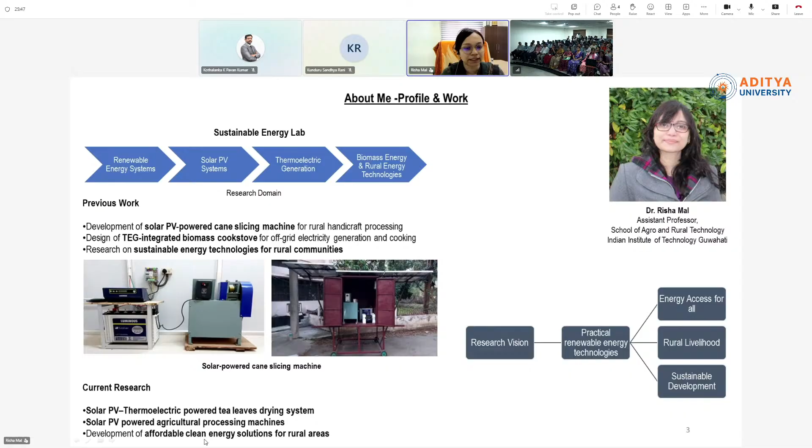My current researches include a solar PV thermoelectric powered tea leaves drying system, and many such solar PV powered agricultural processing machines, and we have also developed many affordable clean energy solutions for rural areas. Now, as far as the title of my today's talk goes, I mentioned three nomenclatures which are prevalent in the topic.

I'll first discuss the meaning of those words, and then maybe I'll move forward. So the first thing is off-grid. What do we mean by off-grid? We know grid, since we are from the background of electrical. But off-grid is something where we are not actually using the power that is being given from the grid - power is not taken from the grid, and it is totally sustainable of its own. It is self-sustained and does not rely on any power that we are getting from the grid.

Next is standalone. Standalone is a device which we can operate from a remote area, and it may require power, but standalone means it is an off-grid system, and it can be operated from a remote power source. Next is net zero emissions.

What do we mean by net zero emissions? This is a term that evolved during the climate change Paris Commission, when they were establishing the SDGs. They said that we should have net zero emissions - that means the balancing amount of greenhouse gases that has been released into the atmosphere.

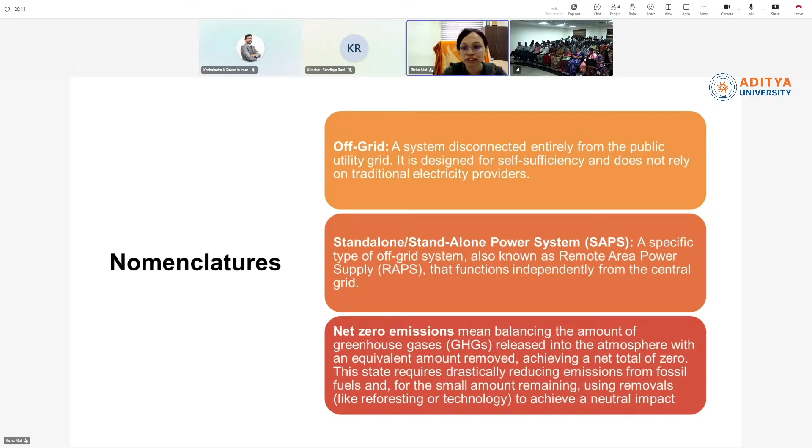So how do we do that? We know that trees do take carbon dioxide to sustain their growth. But this carbon dioxide, where do we get it from? We get it in the process where we exhale, in the process where we have emissions. So both the carbon dioxide that we emit into the atmosphere should be balanced - it should be such that however much is given to the atmosphere should be taken by the plant. That's how it works for net zero emission.

Now, the Paris Climate Agreement, what were the key points for the global impact of giving a shot to the climate change? They had certain things that they pinpointed and said these are the things that have to be looked over, and this is how we contribute to the nation.

So the first thing is temperature. We knew that the temperature is rising every year substantially, and the ozone is being affected. So they said that we should keep global warming in check, and it should be well below 2 degrees Celsius per year. This was the primary key point that they had to check.

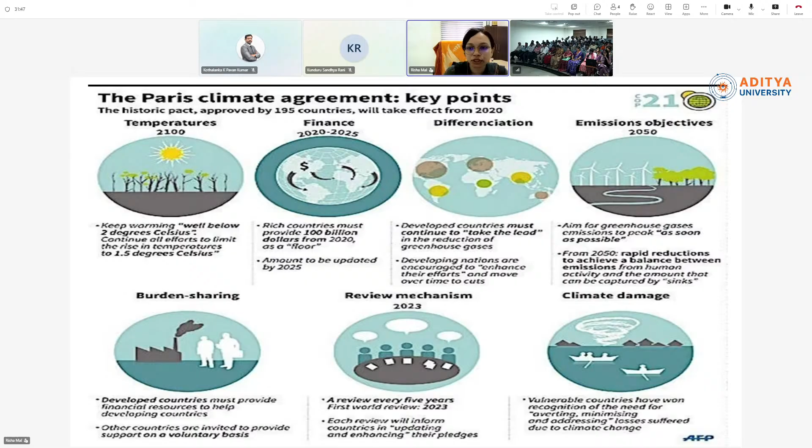And the climate damage. They are also saying that the countries that are very vulnerable should minimize the losses being suffered due to climate change, and they should check on the things affecting the climate change, which has to be mitigated. So this is for the vulnerable and developing countries, that they have to make this prominent, that they have sufficient efforts to make the climate change goals happen.

Now, when we are talking of climate change, there are certain components which enable the environment for off-grid renewable energy solutions. So what are these components that have to be taken care of so that climate change can be addressed? We should have policies and regulations.

We should build capacity so that more and more people are aware of it and can contribute to climate change action. And then we should also have institutional frameworks where institutes come forward with their research and contribute to the climate cause.

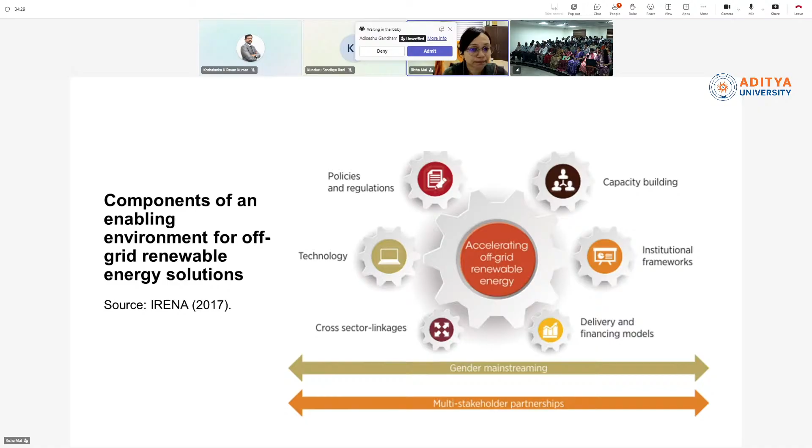Now we will look into some of the renewable sources of energy and what percentage of those renewable sources contributes to the nation's development. We have wind power, which contributes 10% of the total renewable energy sources. We have geothermal, again 10%, tidal energy power 10%, biofuel 10%, hydroelectric power 10%, solar power 10%. So we have this whole bunch of renewable energy sources which can contribute to the development of a sustainable energy system.

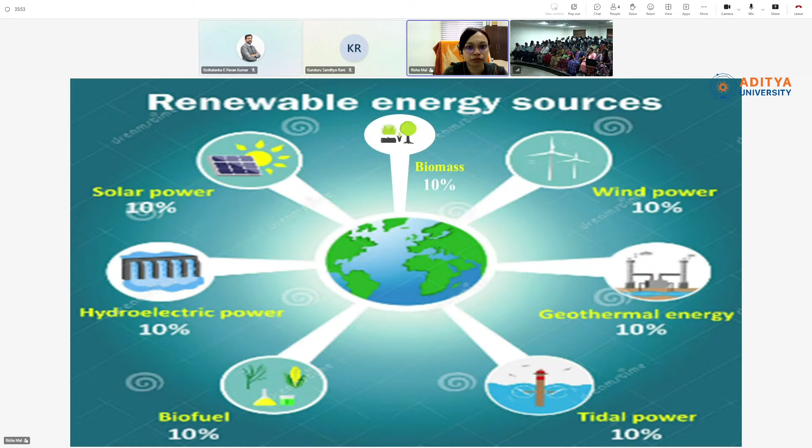But one of the major renewable energy sources which we have overlooked over time is biomass energy, which is also 10% of the total renewable energy sources, and has not been explored greatly for energy or power delivery as in the case of other renewable systems. Yes, biomass has the potential of giving clean energy, but how it has to be done is a challenge, and we are trying to develop technologies which actually run on biomass energy.

So before starting with biomass, I will first concentrate on the biomass technology which we have developed in our laboratory and which runs efficiently. We have developed a system that runs efficiently on biomass, and it is capable of giving power from biomass energy.

So first of all, we will introduce biomass, what it is. Biomass is nothing but all sorts of organic matter like plants, wet waste, and any organic matter you can talk about which comprises biomass. Biomass refers to an energy source, and it can be successfully harnessed by directly heating, by combustion, by burning the biomass to produce heat. One such application is cook stoves.

Nowadays cook stoves, earlier used in most households, are predominantly found in the rural sector. People who reside in rural areas still use cook stoves for cooking.

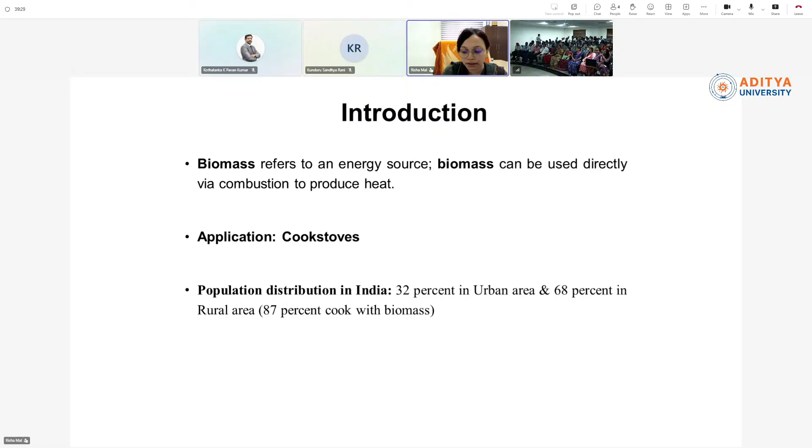What do we use for cooking in our household? We do use LPG gas, right? Yes, so ma'am, we do use LPG in our household, but there are so many households in rural areas who use cook stoves.

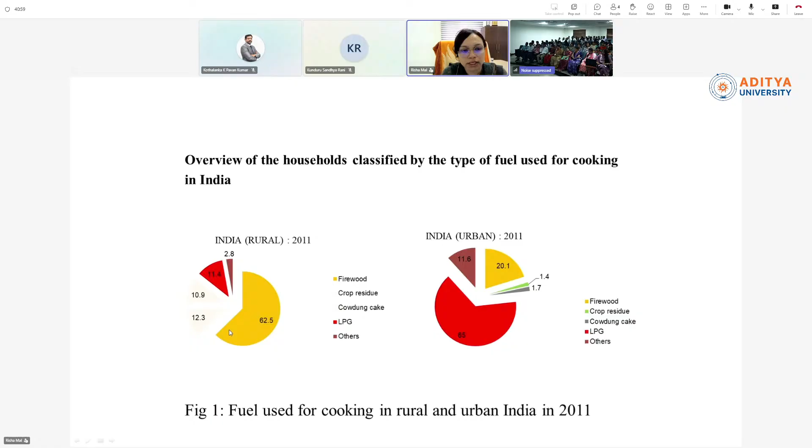Here we can see statistics of rural and urban areas of India. It's a bit older, but nobody has taken statistics after that, so it gives a faint idea of the scenario of cooking in rural and urban areas. In rural areas, a larger chunk of people rely on firewood, crop residue, and cow dung cake, with a very small percentage relying on LPG. On the urban side, most people use LPG, but a very small percentage use cook stoves, firewood, or crop residues. Those who stay in slums or in very poor conditions actually use cook stoves in urban areas. So we can see a clear difference in the usage of cook stoves in rural and urban areas.

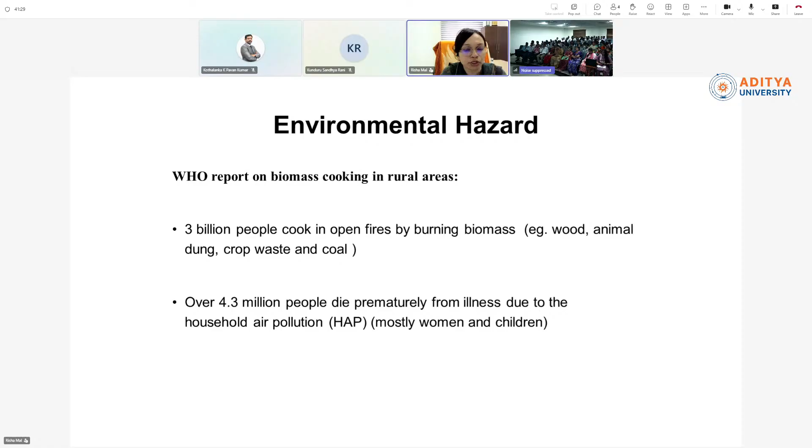Now, what is the impact of using those cook stoves? The impact is environmental hazards. The WHO has reported that nearly 3 billion people cook food in open fires burning biomass, and statistics say that 4.3 million people actually die prematurely from illness due to indoor air pollution, with the affected population mostly being women and children.

Now, this is what a cook stove looks like. Those who have not seen it may recall it. I do not know whether I am good with the language, what you use to call this stove. Is there any term for this stove?

Ma'am, in Andhra we call it as katla-poyi. So, yeah. Okay. It's the same thing we use. That's good. Yeah.

Okay. So I think because of the term that I'm using, most of you have not understood what it is. So this is what the stove looks like. This is predominantly used in rural areas. So what is this? They use this for cooking food, and many countries all over the globe use this cook stove, or three stone fires, three stone stove we call it, for cooking.

So these are some of the places like Cambodia, Nepal, Guatemala, where this kind of stove is actually used till date for cooking. These run on biomass; they use agricultural waste, cow dung cakes, those sort of things to feed inside the cook stove, light it and then cook food. But you can see the amount of emissions it is giving out. Now, what is the problem? We know the problem. It is the environmental and health hazard.

Now, many kinds of cook stove designs have come up. Why they have come up with efficient cook stoves is because people want their food cooked in cook stoves, because there is a factor of taste in India; they say if you cook with biomass, it gives a different taste. Again, the advantage is much more because they do not require money to buy fuel to feed inside the cook stove. They do not have to worry about any construction or maintenance charges. So everything is free of cost, and it is very handy for everyone who resides in rural areas. So they are actually using those kinds of stoves.

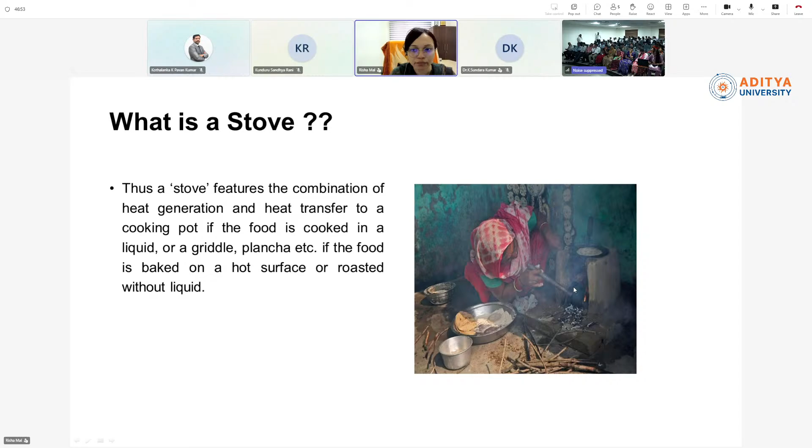You can see in this picture, right? She is using a small pipe. So this is how she is improving the combustion of this stove. She is blowing air inside the fuel, and she is trying to make the combustion better with low emission. But this is not enough air that she has put in. So these kinds of stoves have evolved out of researchers.

Now, this is the concept that we have proposed for a forced draft stove. We should understand that a natural draft stove does not have a fan and a forced draft stove does have a fan. The stove that has a fan is the most efficient one, because it is actually driving more air inside the cook stove. So this is how a forced draft cook stove looks. It is a two-chambered stove.

It has small holes on the top and also in the bottom, and there is a small vent where a fan has been connected, and this fan drives the air inside these holes so as to increase the air to fuel ratio. Now this fan is driven by power, right? Any device which has to be run should be run by power. So this fan runs with the help of power.

But in rural areas, some places do not have power supply, right? This is a genuine problem prevalent in the rural areas of India. The woman cooking on the right hand side of the slide does have an LPG cylinder, you can see, but she prefers cooking on the traditional cook stove. It means that though the LPG connection is there, she still relies on traditional cook stoves.

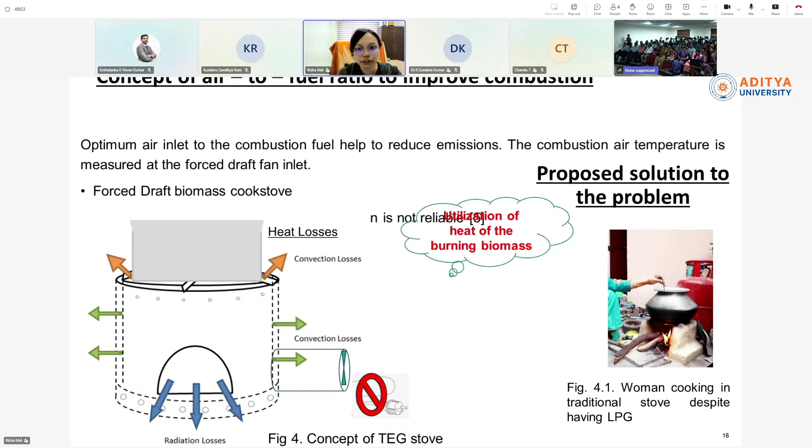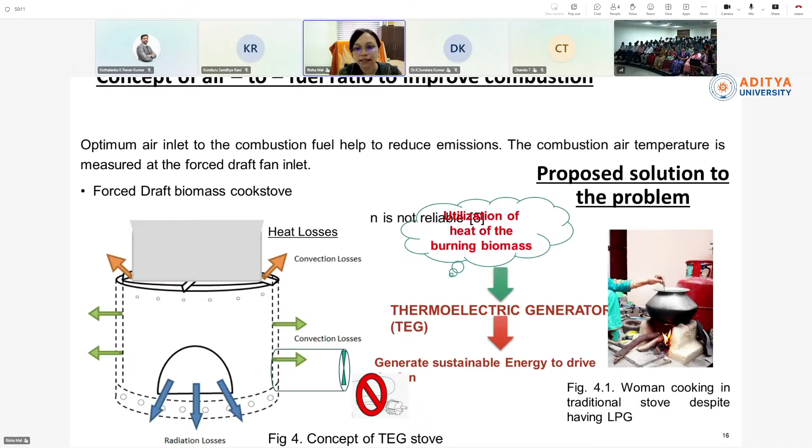So the concept is we are utilizing the heat of this burning biomass, and we are using a thermoelectric generator in this cook stove to generate sustainable energy so that we can drive the fan. Now we will talk about the thermoelectric generator, what it is and how it works. This is the point where we as electrical engineers can come forward and contribute to such real life problems. So what is a thermoelectric generator?

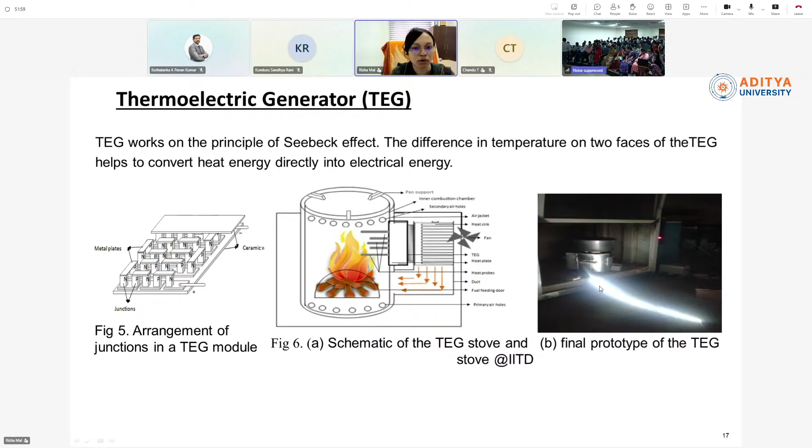And this is the laboratory scale prototype of the thermoelectric generator cook stove. See how efficient it is. It is burning efficiently without emission, and it is also lighting a small lamp. So this is how the final product looks. Okay, so now we will understand a little about what thermoelectrics is.

So we have understood that the fan that we require to drive the forced draft cook stove needs power, but here in this TEG cook stove we are not using any power from the grid, and we are solely developing our power from the burning biomass, and then this power is used to drive the fan, right? So this is how it is, and we will understand a bit of thermoelectrics, how it works.

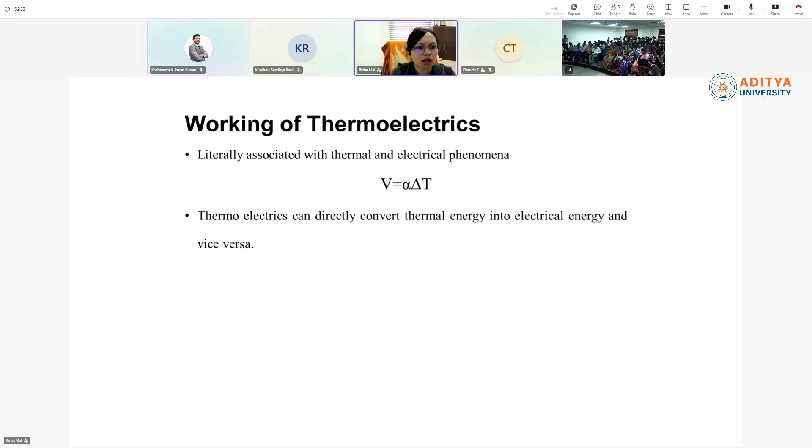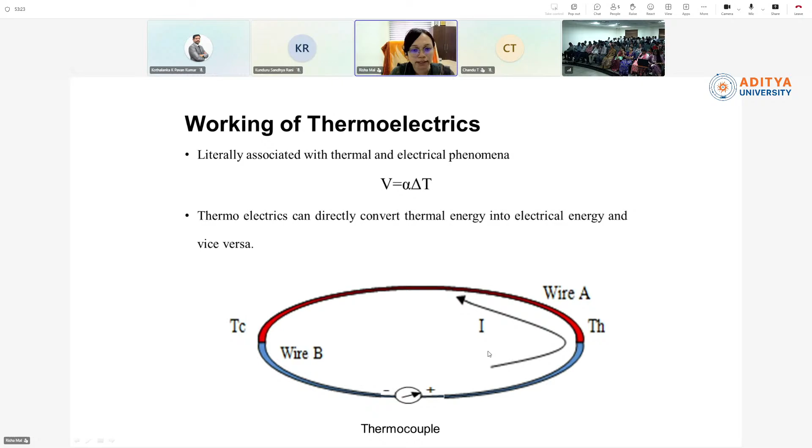As I said, if we apply heat on both faces of the thermoelectric generator, then it will develop power from the difference in temperature. But a very primitive one, if we try to understand, this is how it works. If we take two wires of different material, wire A and wire B, and we make a junction at two points and keep one junction at a hot temperature and the other junction at a cooler temperature, we can see the deflection of a galvanometer stating that power has been developed between the two wires. This is the fundamental of how thermoelectrics works.

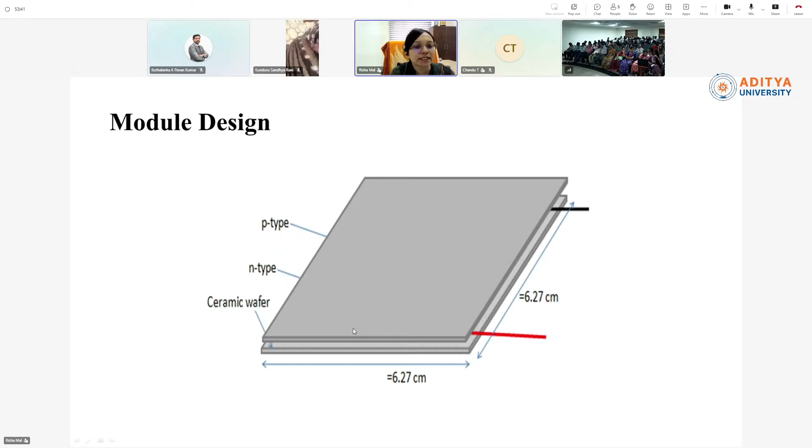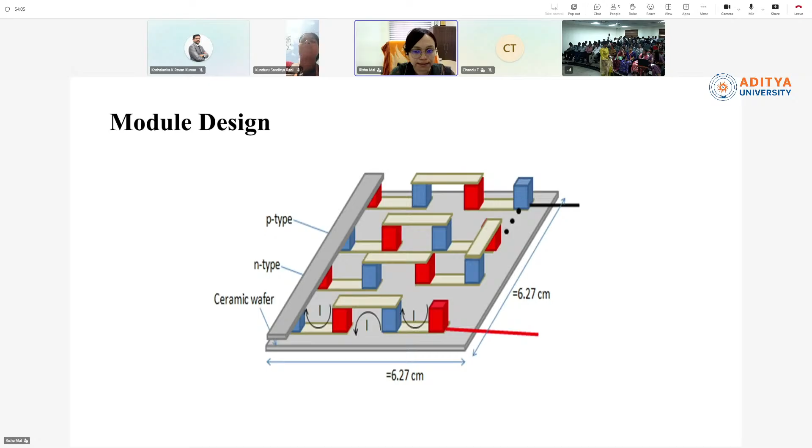This is how the module looks, right? As I said, this is a small chip which is 6.27 centimeters on both sides, a square plate, and it is covered with a ceramic wafer. If you see the inner side of this thermoelectric, we can see small legs of P and N type junctions. They are connected in series with each other, so that when we put this in any heated device, it can sum up the voltages, and the power delivery rises up. Right?

This is one section of the P and N junction that is put inside the module. So here we can see it is made up of N-type bismuth telluride material. The other one is the P-type bismuth telluride material. The N-type bismuth telluride material has more negatively charged charge carriers. The P-type has more positively charged charge carriers.

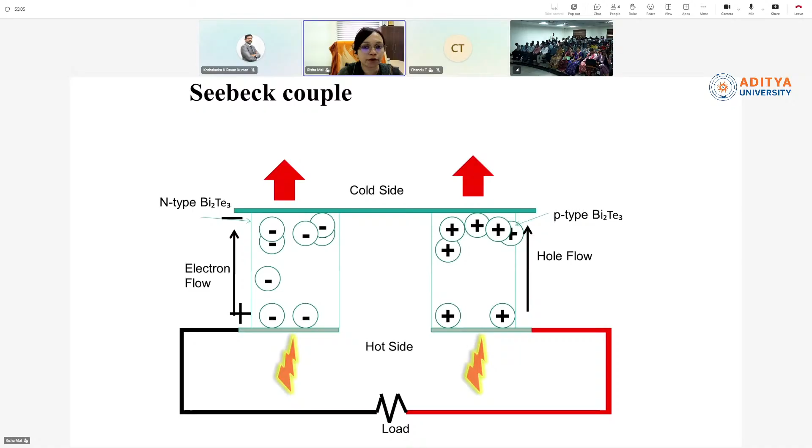Now, if we apply heat on one side and keep the other side cooler, the heat from one side makes these charge carriers excited, and these charge carriers tend to move to the cooler side of the thermoelectric. So this flow of charge carriers gives a difference in density of the charge carriers, and this difference in density helps to let a current flow inside this P and N junction. So if you connect a load, maybe a small bulb or something, it will glow up, right? So this is how it works.

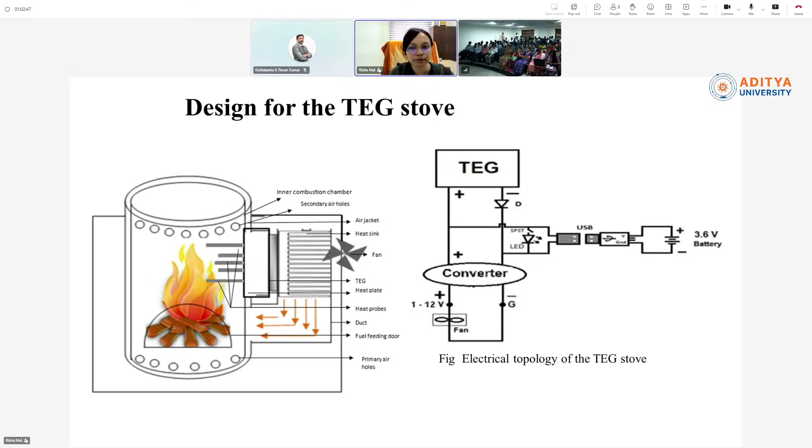It is a red LED because a red LED glows at 2.4 volt. So 2.4 volt is the mark where the fan runs efficiently, and after that the power delivery is more than what the fan requires. So when this small LED glows, the next load can be plugged in to get the power from this thermoelectric. So we are making an efficient stove with less or no emission, and also getting power to light a small lamp, charge a battery or even charge your mobile. So that provision we have kept.

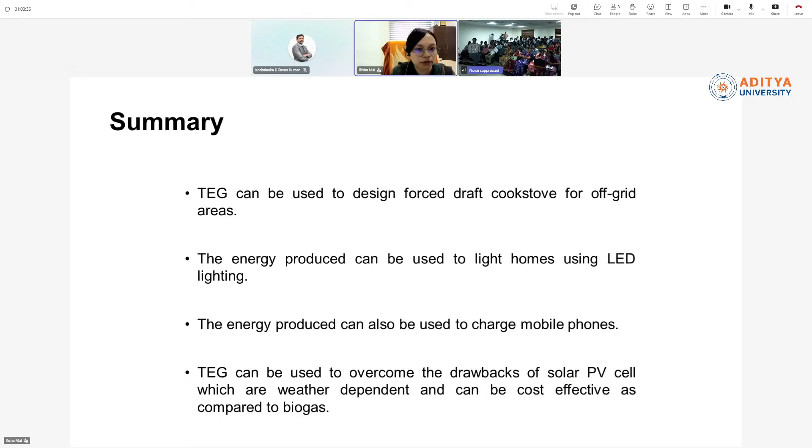So the summary of this technology is that we have efficiently designed a forced draft cook stove that works in off-grid areas. The cook stove has the power to light homes with LED lighting. It also has the ability to charge phones, right? And it can overcome the drawbacks of cook stoves which run on solar PV, which is weather dependent, or stoves which run on biogas, because biogas is again a very costly source of energy. So this is one technology that I have talked about.

This is the next technology, which is again an off-grid solution, and I will talk a little bit about the practical problem that is prevailing, and then we will talk about the solution that we have come up with.

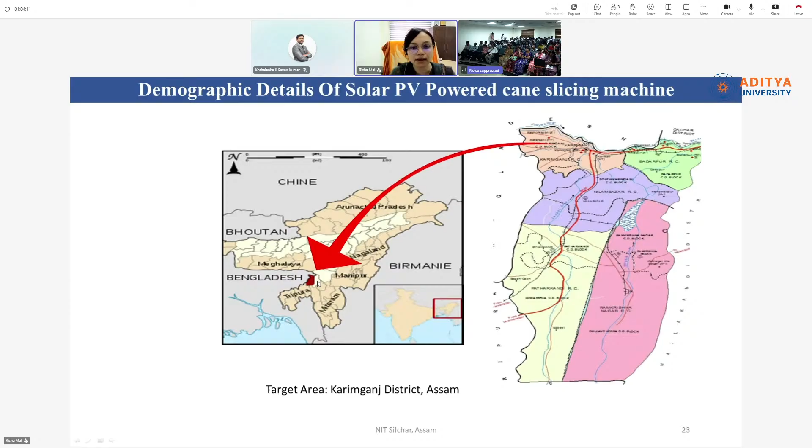So this is a small state in northeast, in Assam, which is known as Shribhumi. Earlier it was known as Karimganj district. Now it is known as Shribhumi. So this is a small city, we can say, and it has a number of villages in the place.

So what are the livelihoods of the people who are there in these villages? They are dependent on cane and bamboo handicrafts. So they make handicrafts out of cane and bamboo, and they are very much skilled in making mats, like cool mats, which are used in households in humid times, so that the temperature in the bed can be cooled down. So they make such mats, they put these mats on top of the bed, and they are actually working good for this humid region in the northeast, right?

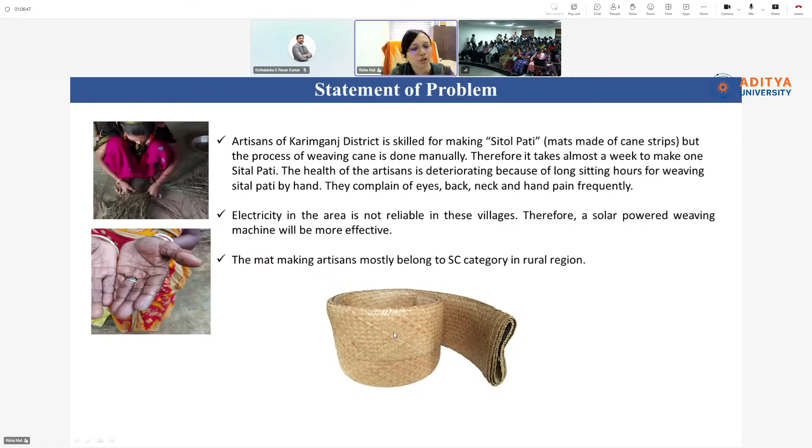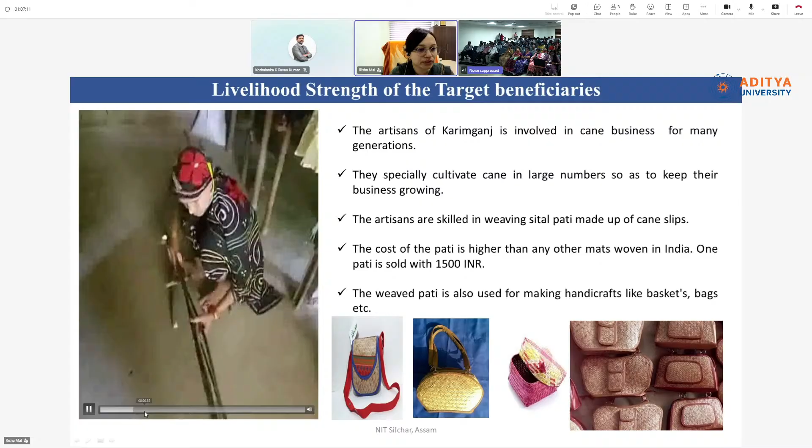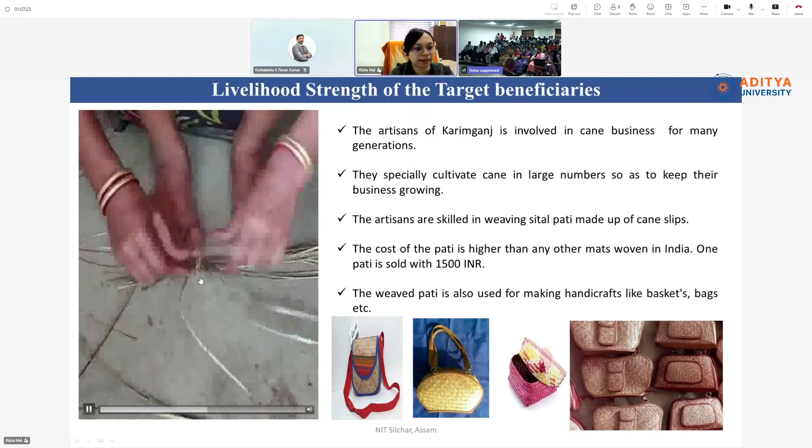We'll see a small video of how the woman actually does the work. So she is stripping these cane plants, and if you want to see, this is how the woman strips this cane with mouth and hand. They are actually stripping these cane slips. And this is the final thing, how they are weaving these cane strips into mats.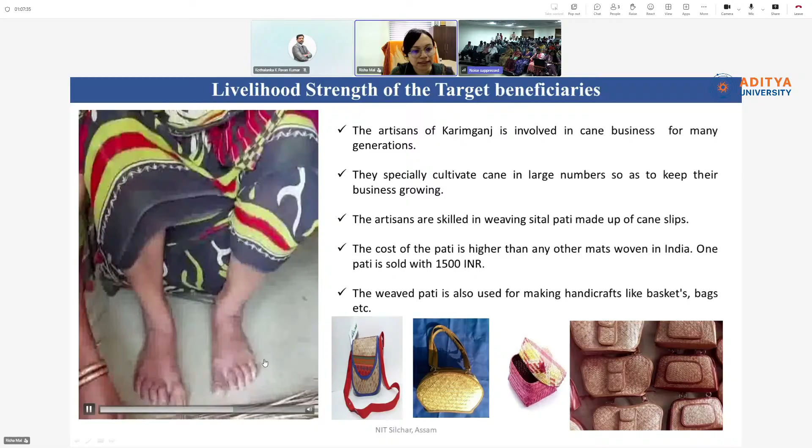They get a very minimal amount of money and it is very difficult for their sustainability, but this is the primary business that they do in a household. So most of the households have women who are engaged in this kind of small household business. Also, you can see this small girl who is actually weaving this mat. This is a mat of 5 foot to 6 foot. Various other dimensions are there, right? So this is how it is.

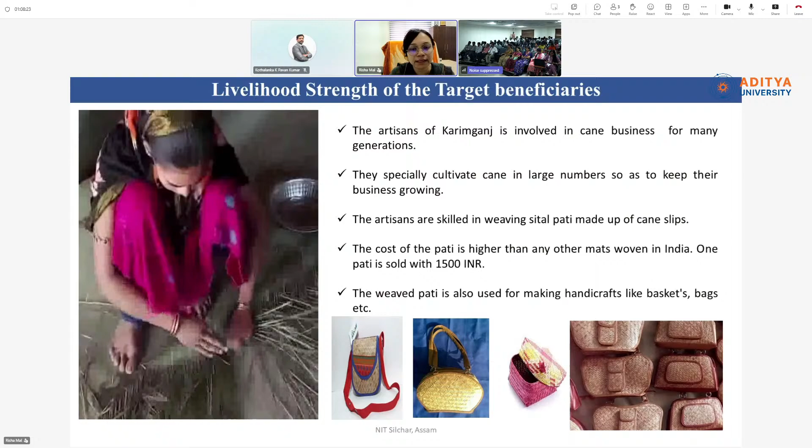On the right hand side, you can see there are a number of bags and baskets which use these cane mats to weave the bags and baskets. The money that they get from selling this pati is like 1500 rupees, which is a very small amount of money. Most of the money is taken away by the middleman itself. So whatever remains in their hand is a very small amount.

And this project has been funded by the Department of Science and Technology, and we have successfully deployed it, and people of the Shribhumi region are using this machine to slice cane in their day-to-day life. So this is one thing. There is another technology I want to show you.

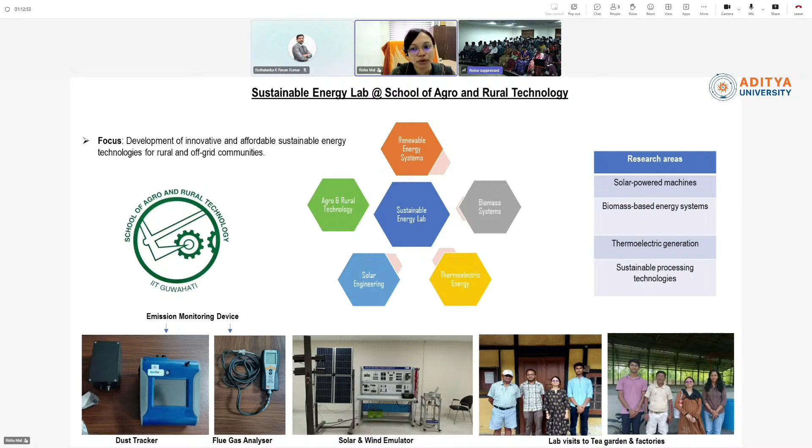So with this, I want to wind up here. Thank you very much for your patient listening. Thank you, Dr. Pawan, for the opportunity to present our research in your conference. I'm very lucky to have you all. Thank you.

If you have any questions from your end, I will be happy to answer. Thank you, ma'am, happy to have you, and first of all, thanks for accepting our invitation. Yes, yes, thank you, Pawan, thank you for having me. We have a long lineage from NIT Silchar, so good to see you after such a long time.

Thank you, ma'am, so we have a number of known faces for you here. We had Ramudu sir, Balakrishna sir, Basha sir, Bala sir. Hi madam, hello, how are you? Good madam, I'm good madam. I think that's good, yes madam. And one more faculty is there, madam, so good to see you. Nadeem sir is also here, ma'am. Yes, yes, hello, nice to hear you after a long time, ma'am. We have met after such a long time - none of us are in NIT Silchar anymore, everyone has moved on. Mostly who were there at that point of time have left NIT Silchar right now, working at different locations, but luckily we had more gathered over here, especially in our department.